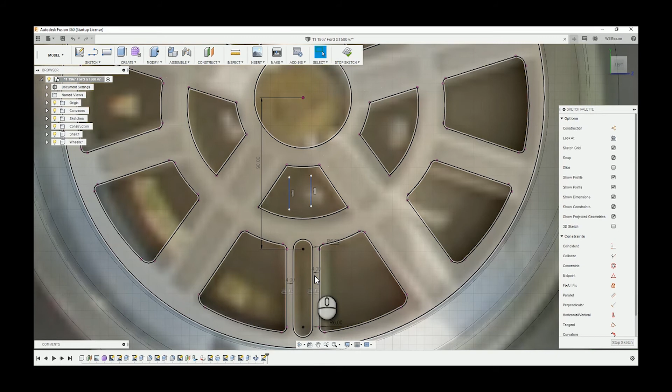In the last episode we added some features to the hub, and we'll be adding a few more in this episode. I drew that slot at the bottom last episode, right at the very end, and now I want to draw the slots that rotate around the center of the hub.

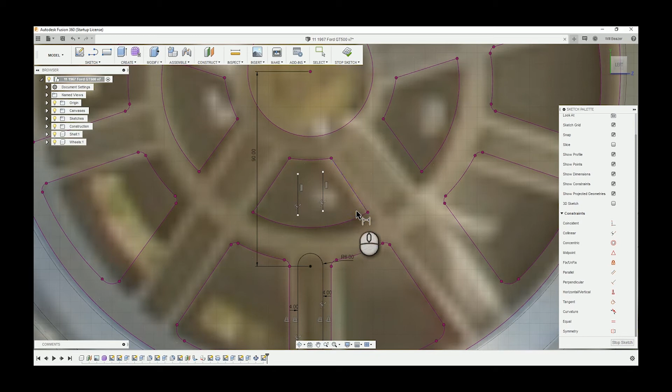At first what I do is I draw it directly above, and the reason is because vertical lines are easier to work with. You don't have to worry about angles.

I could have gotten around this by, instead of drawing at the bottom of the wheel, drawing it at the top, which is currently out of shot, there would have been both sets of lines. But you see how I'm drawing these lines? I'm not actually drawing them over anything - I'm trying to picture those shapes just to the left and right of it.

But soon I give up, because it's quite a stupid thing to do.

Having a look at it, I played around for a bit, seeing if I could figure it out, but I thought, no, sod it, I'll go this way.

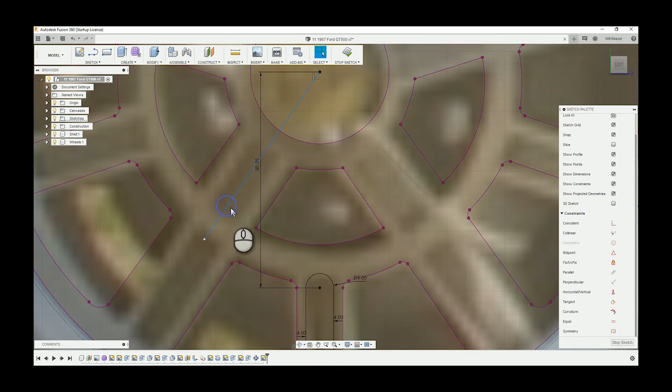So to do this, I need to know the angle of the line I've just drawn. The way you do that is simple maths - there are 10 spokes on the outside and 5 spokes on the inside, so I know that 360 divided by 5 is 72. That's just a simple bit of maths you can do in your head.

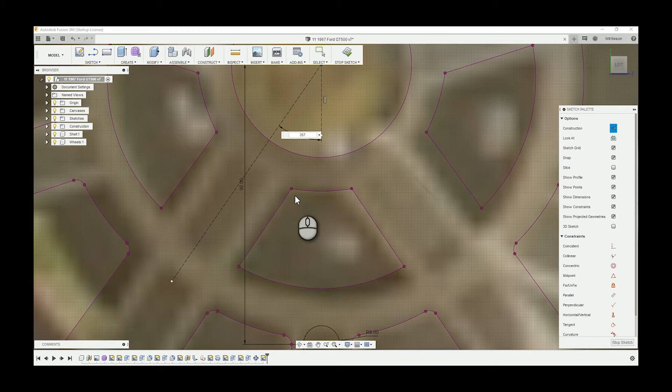And then half of that again, because it's like 1/10 of the gap, so it lines up with the bottom sketch I've already drawn. It's basically 1/10 of 360. First I typed 35, then I changed it because it's 36 - so yeah, 36 degrees.

There we go, and now I know that's lined up. Last time I used the offset tool and then drew some arcs, and I begin to do it, but then I cancel it because there is a slot tool in the sketch section.

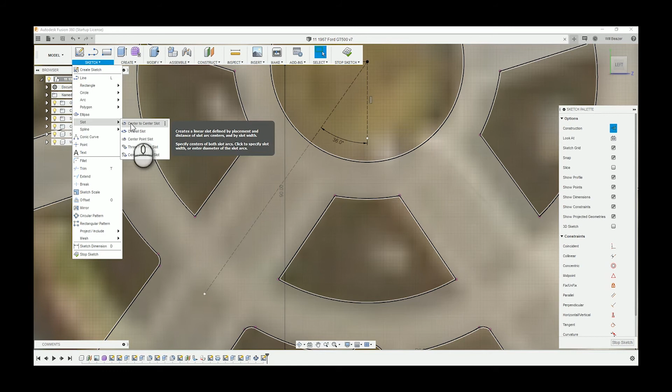So, slot - select that one, and then click two points on that line. They should automatically be coincident to that line, meaning they should automatically attach to it.

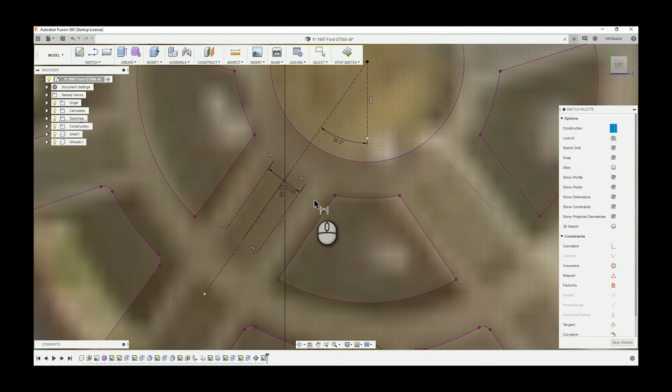One way you can guarantee they're attached is if you draw the slot off of the line and then use constraints to attach it after, because sometimes it might look attached to the line and it might not be, but in this case I do know it is.

So then giving it some dimensions, that's starting to look a lot more similar to the shape you can see on the canvas. I know the canvas is quite blurry, because I'm so far zoomed in on such a large image, but I can still make out the shapes behind it.

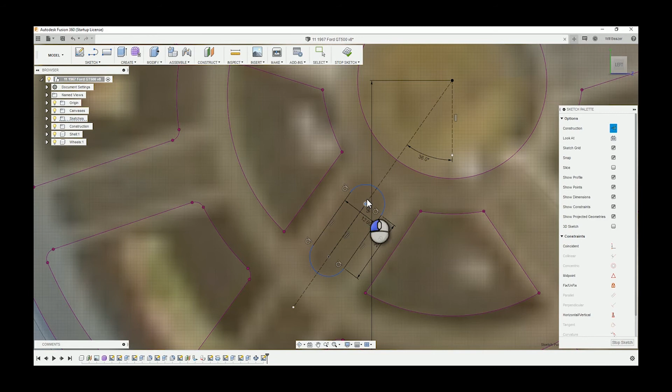So that looks a lot better, and then I'm just trying to get rid of those blue lines, because I know they're unconstrained, so they can currently slide up and down. I can fix that by giving a dimension between that dot I've currently selected and that one up there.

And then just having that across, and then typing in just an integer as per usual. There we go. So now I have the two shapes.

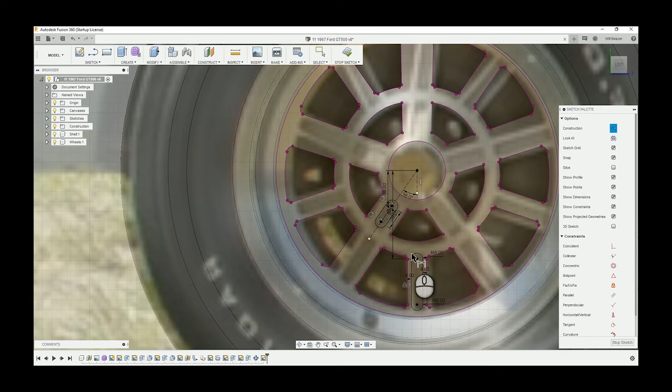So what I should have done at this point is actually, while I'm still in the sketch, I should have circular patterned those two entities around, and I will talk in a short while about what I did and why I made a mistake not to do it.

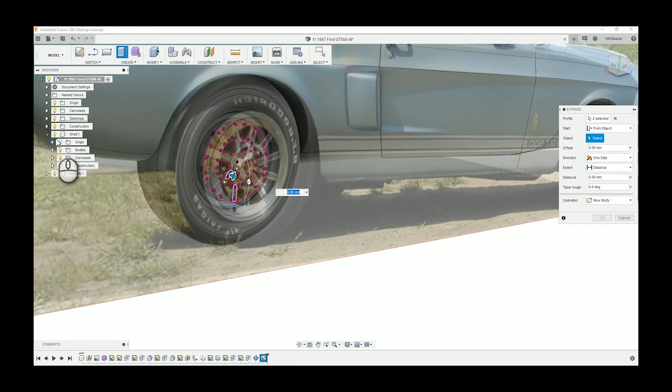So I extrude these cuts, and this time I use the from-object feature, so where it says start rather than just being from the plane, I use the from-object feature, and that just kind of angles them. So now when you see, rather than extruding flat, they're on the angle that the wheel is on. That's why that happens.

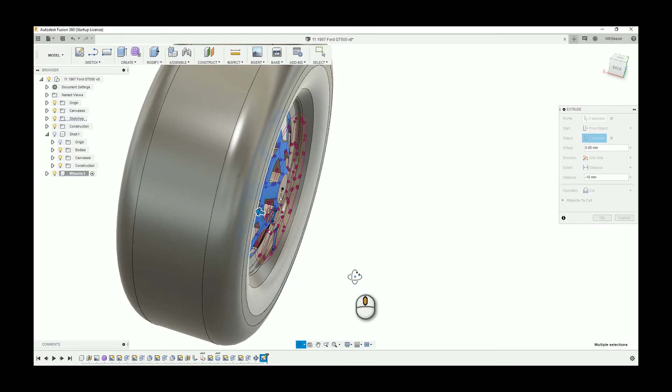So the reason why this is a mistake to do it in this way is because when I go to circular pattern those two features, the problem is one of the features I've got patterned 10 times, and one of the features I've only got patterned 5 times, but I can't do that in one circular feature. I have to do that twice, because you can't select something to go around a circle 5 times while something else is 10 times. They're just two different operations.

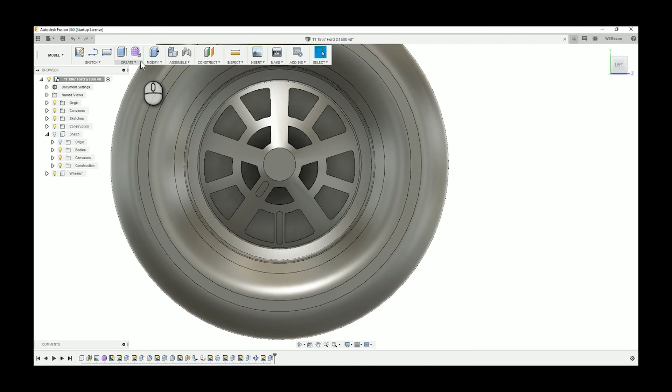So what I actually do is I go to do the circular pattern and click features. Well, they're both in the same feature, those two cuts. So instead of me being able to click one of those cuts, they're both together. That causes me a problem because I've patterned it 10 times and I don't need those 10 cuts. See, in the middle, that's 5 too many.

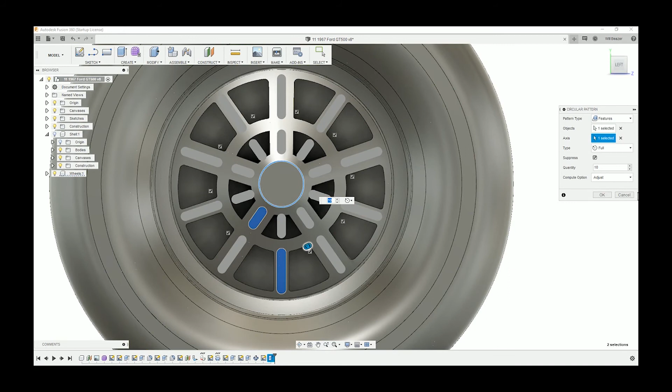So then I have to go back and change the extruded cut so that it's only one of those sketch entities. So I choose that one. And then I make a second extruded cut that's a different feature for the other slot.

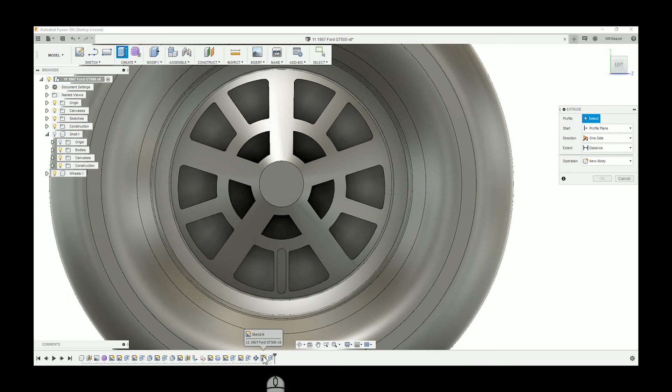And going back to why I should have done it in the sketch, the circular pattern in the sketch - basically if I'd have circular patterned it in the sketch, I could have extruded all the sketch at once, and it would have taken out 3 features on the feature tree at the bottom. So there are 3 extra ones that really aren't required here. This is a second extrude, which I shouldn't have had to have done.

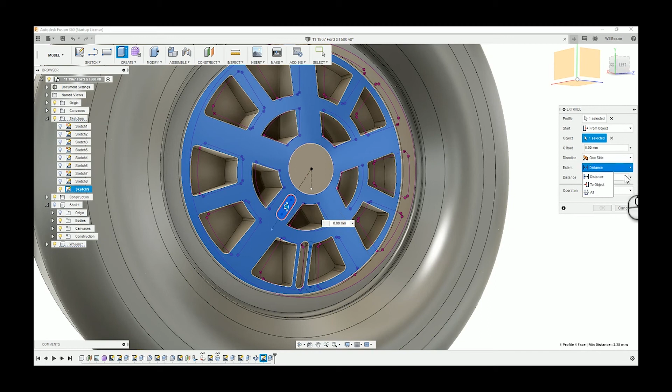And then I do 2 circular patterns as well. Just moving that back. I'm hoping I'm not being too quick with this for you to understand, but yeah, so I have to do those as 2 separate features if I'm doing it in this procedure.

But like I was mentioning in the last episode, there are many ways to do things. You know the phrase 'there's more than one way to skin a cat' - that's a typical phrase. But it's true, and knowing which one is really important. So in this case, I just do it the long way around. But really, it would be good practice not to do this.

So even then I've selected both features, but I don't want both, I just want one. So you can click them down in that feature tree at the bottom. There we go. And then I want that one patterned 10 times. So there we go, 10. And that fits the shape.

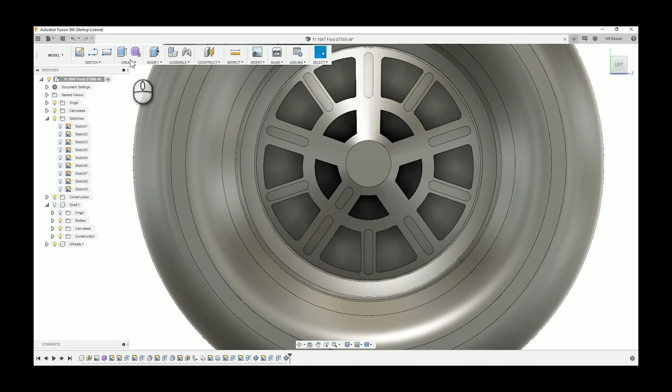And then I want the other one patterned 5 times. So that last circular pattern and the circular pattern I'm doing now, I wouldn't have had to have done if I'd patterned the sketch instead. It would have been a pattern in the sketch and then 1 extruded cut, and that was it. Whereas in this case, there's 2 extruded cuts and 2 circular patterns as features in the tree. So yeah, could have definitely cut down on them, but there we go.

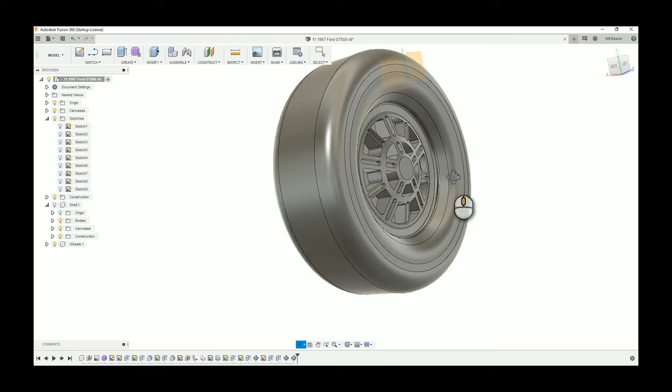That's kind of finished now. Well, almost - I'm going to add 1 extra feature, and this feature that I'm about to add, it's not actually in the real car. The car doesn't have this feature, but I do it for a reason, and it's basically adding a little hub thing on the center of the wheel.

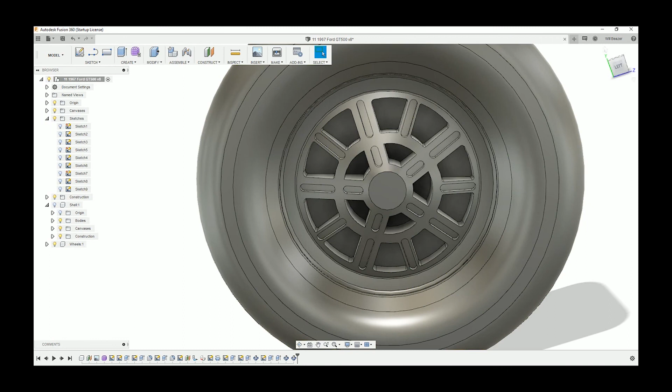I will explain exactly why I do it once I've sketched it out. So yeah, on that section I want to add a bigger kind of hub thing that has a bit of a radius to it.

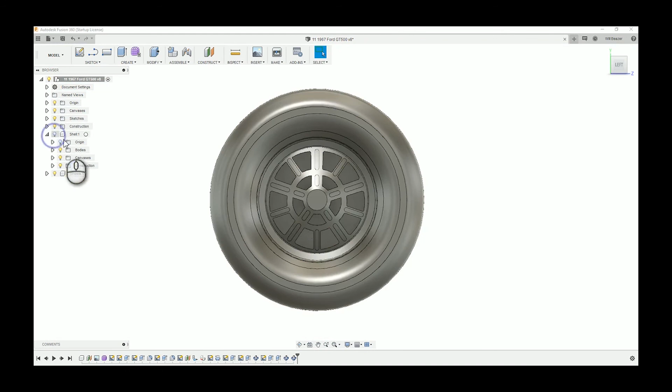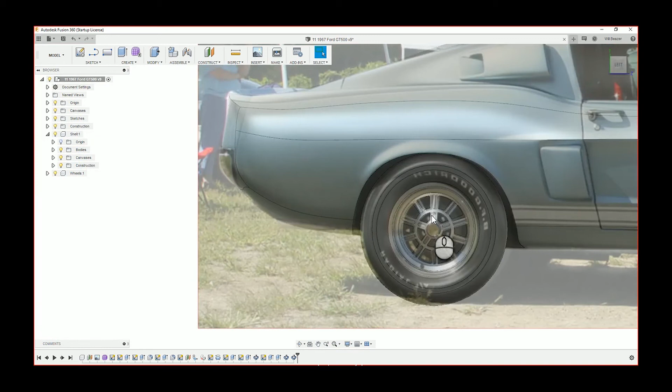There's a gold thing on the wheel that I'm going to enlarge a bit and put a slight radius to. I do that by doing a typical revolve extrude and joining it onto the wheel. First I've got to take a sketch from that plane there. Create a sketch.

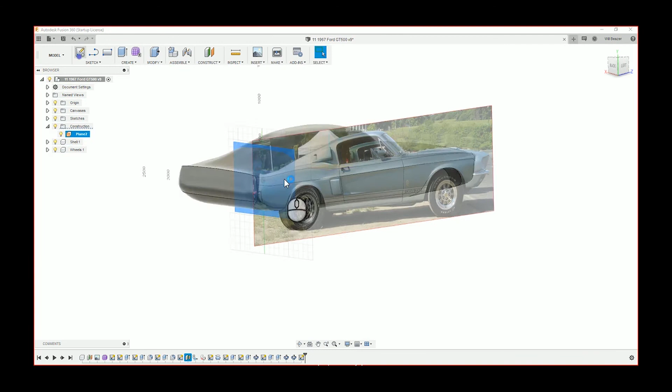The easiest way to figure out where the hub is, is to turn it on another angle and then use the project tool to project that hub onto this sketch so I know exactly where it is. You can just about make it out, that kind of pink line.

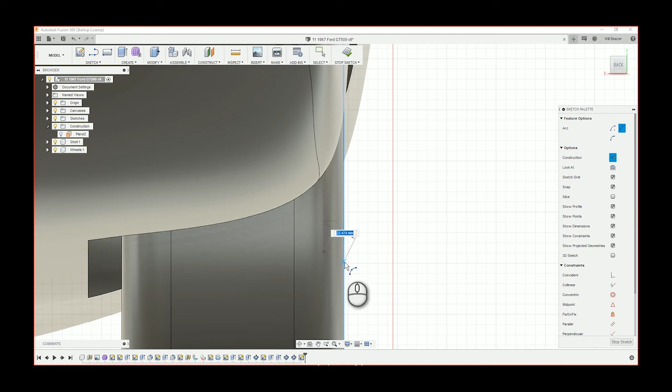I'm going to create a little hub cap sort of thing that comes all the way out to level with the tire. I do that by creating this kind of curved arc outwards - that's a 3-point arc - and giving it some dimensions just to constrain it.

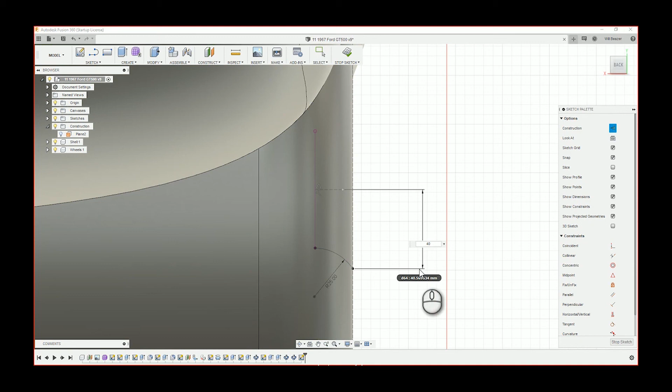So almost there, we've got to add... actually it's a bit further away, but you can kind of make out the shape I'm doing here. It's kind of a rectangle where the bottom edge is curved, and once rotated, that will create a little shape that flares out a bit, like a wine glass, but without the hollow bit in the middle.

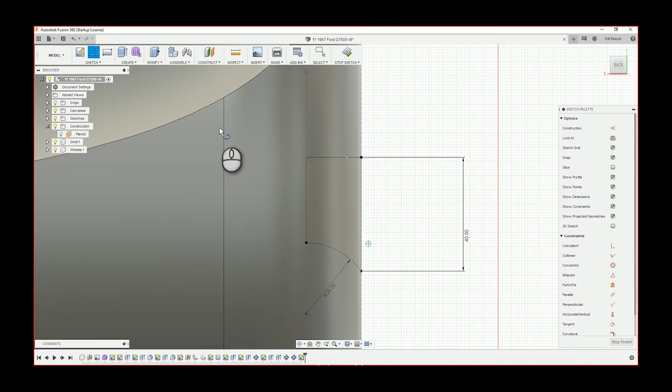So you can see the kind of shape I'm making. I'll start explaining why I'm doing what I'm about to do. This shape I'm actually creating is not for the purpose of aesthetics or to be accurate to the Mustang - it's actually for rendering purposes.

I did a 3-month placement where I did a lot of designing, but I used to do a ton of renders for expos across the globe, focused mainly in Europe and America. I would do renders for this airport seating company, and I'd have to create leathers and metals and make them as accurate as possible.

One of the things I learned over this time is that the best way to figure out if a material is rendering well, or if it's the right kind of shade, is to have a concave shape and a convex shape in your model, just to see if things are too reflective, if things are too light.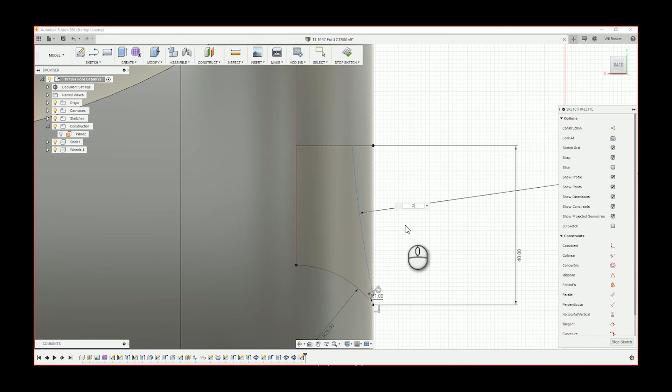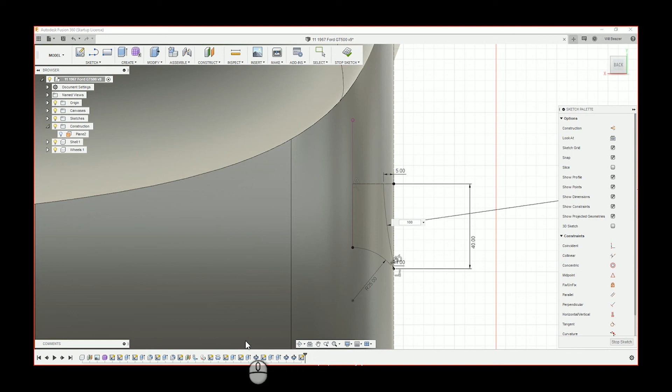So I've added this kind of shape, and once rotated it will be a concave shape, purely so that I would be able to see it when I render it and say, okay, this is too reflective, it looks too shiny, or this is too dull, or this is the wrong color. I've kind of got into a habit with some projects - it's just to put a little model that's concave or convex on the outside to measure how the colors are working.

So for the metal on the hub, it's really good for me to have this little section I'm about to create, purely for rendering purposes - this shape has absolutely nothing to do with accuracy.

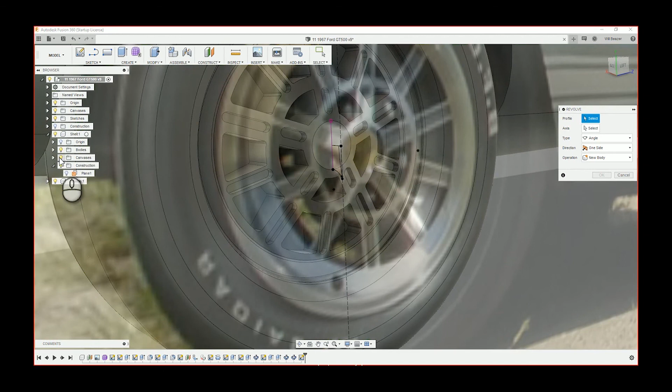But yeah, that concaveness - usually when you have a concave shape, it's a bit more reflective than it is naturally. So now you see the shape I'm on about - that front face is slightly dimpled in, slightly concave, and for rendering purposes, that's really handy for me.

Just on the wheel, because otherwise all the rest of the surfaces were kind of flat on that wheel. I know they're rotated, but other than the actual tire, the actual inner hub is all quite flat shapes and sharp cuts. So having something with that curvature is really handy from a rendering point of view. I'm not saying you'll need to do this, but it's worth knowing.

Anyway, I think that's gonna be it for this video. Hope you enjoyed it.